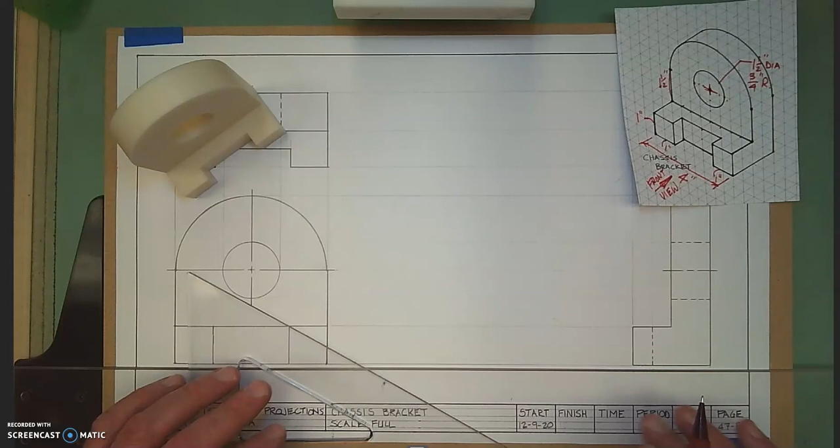The last video I created had shown how to draw the orthographic projection, and I had to stop short. I added the center lines in the front view.

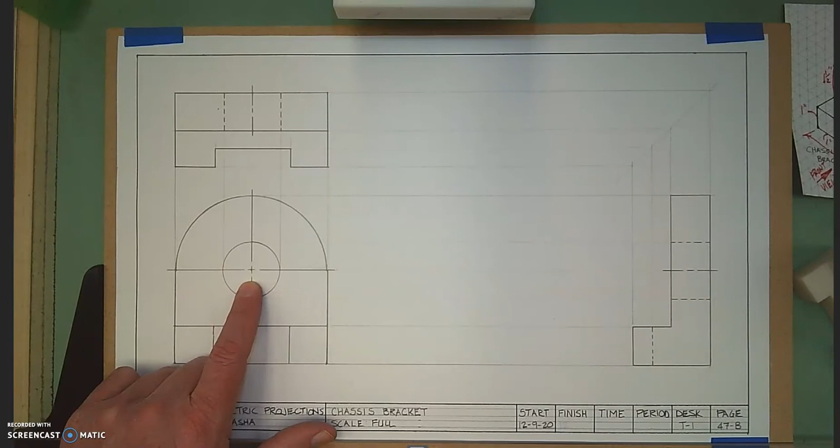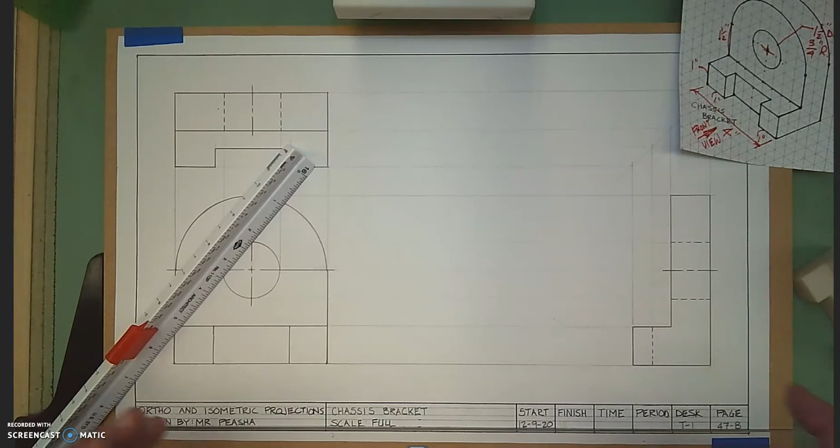Your instructions say that the isometric view is going to start at a point 5 inches away from the right hand borderline, but 7 inches down from the top borderline in our working space. This object is not very thick, it is more narrow. So I'm going to measure over from this borderline 5 inches, and then measure down from the top borderline 7 to get to that point right there.

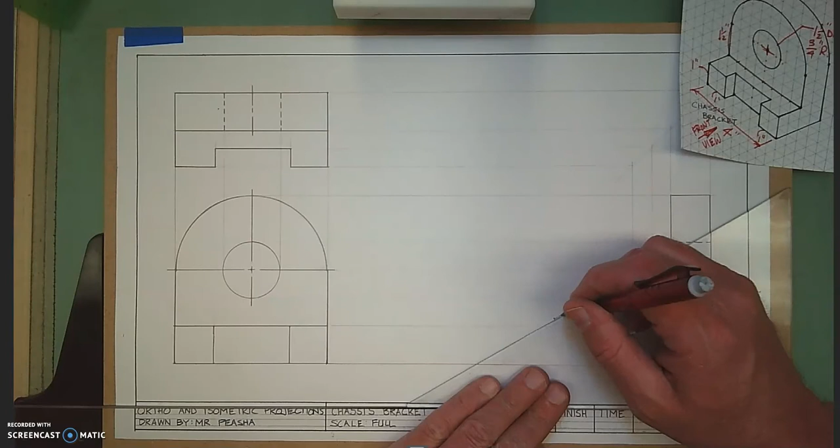Now in this view, all of the lines that are not curved are going to fall on these 30-degree lines for the isometric. So as I start to draw this, I'm going to make some measurements. First I'm going to draw a line up to represent the height of this object. I'm going to measure up 1 inch.

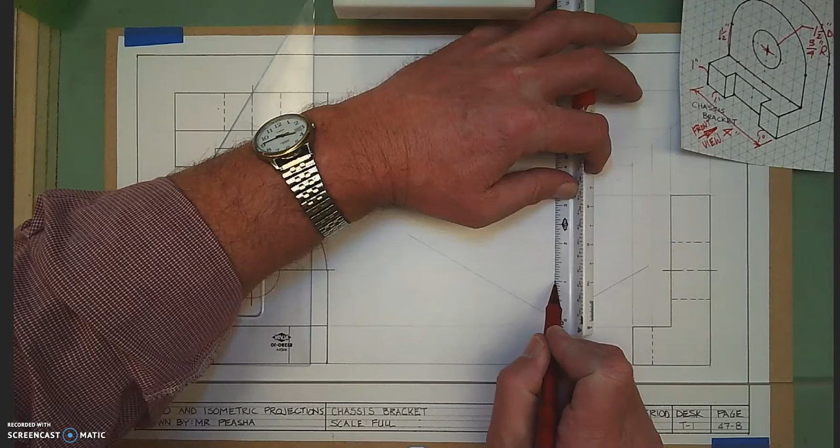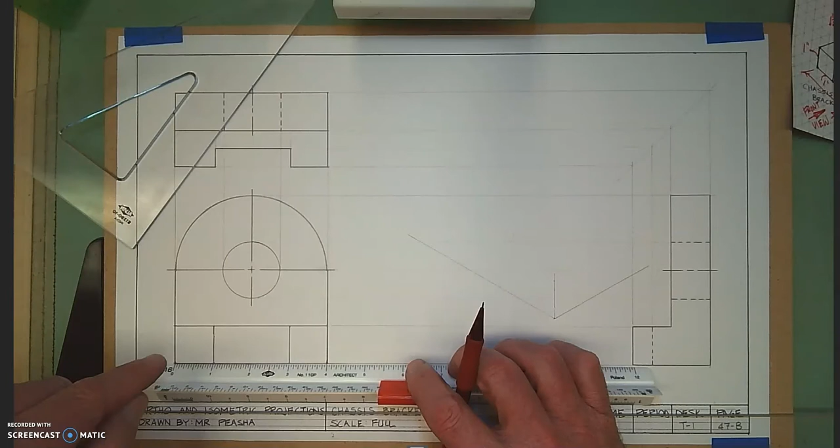And then to find out how wide this is, I'm not going to look at the sketch, I'm actually going to measure my front view. I know that this first line is 1 inch away, there's 2 inches apart, and then there's 1 more inch. So I can measure every line right from the front view to draw my isometric view.

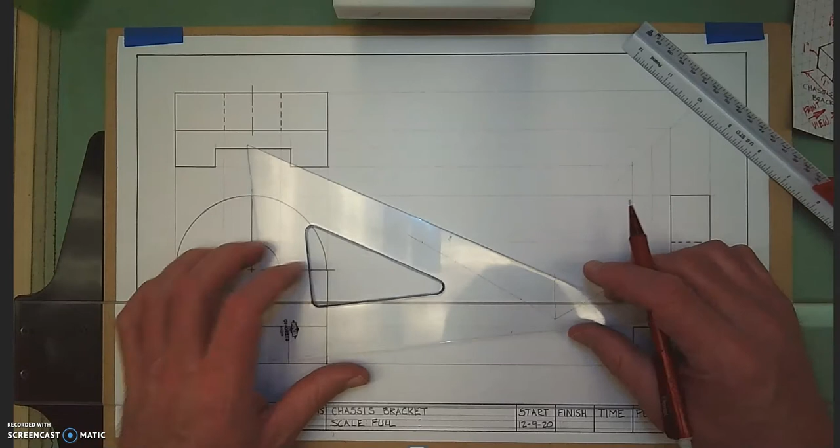So I'm going to make those measurements now on my isometric view. I can measure off 1 inch, then 2 inches, and then again those 4 inches. And now I can draw this front plane with confidence, knowing that I'm going to draw a light line there.

I can go ahead and darken lines as I go. I typically will draw the light lines first, but to save time in the video, I'll draw in these dark lines, representing that front plane.

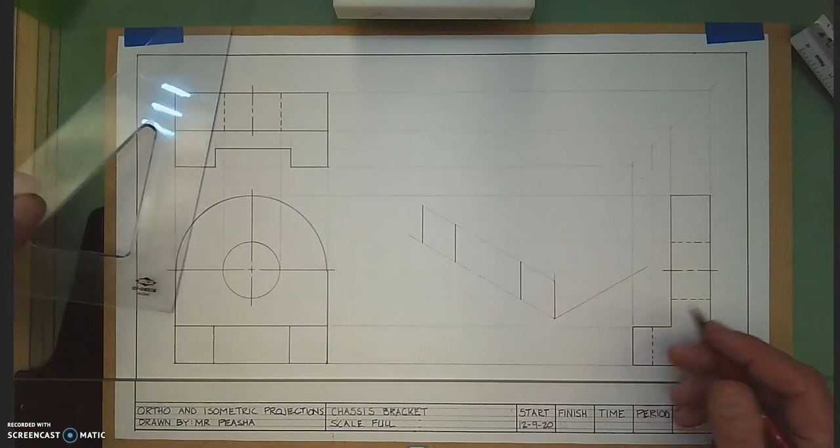I can make the exact same measurements on the right side view. I know this overall thickness is 2 inches, and this back part thickness is 1 inch. I can measure it right from this right side view.

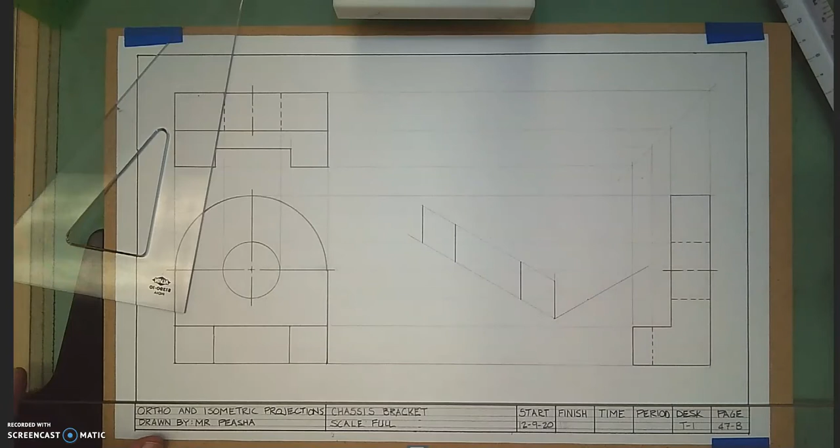So I can make marks on my isometric right on there for what those measurements are. I draw a line up this way and a line up that way. Now I'm going to go ahead and draw in this line here.

I'm going to lightly draw in the surface of this plane, and here's why I'm going to do this, then I'm going to darken these lines.

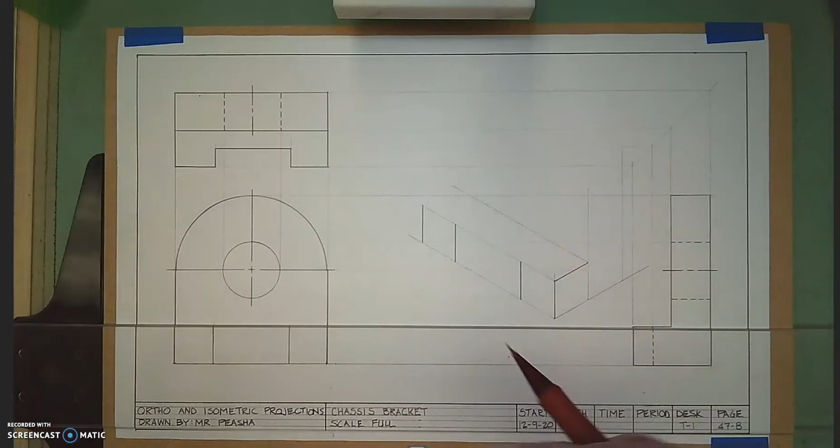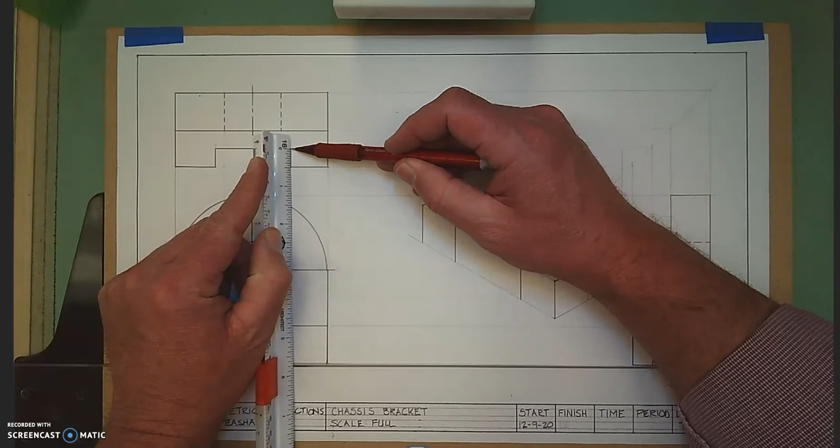For the sake of my demonstration here, I need to make a mark here and here. Then this line is going to go back a distance of this measurement right up here, which is 1/2 of an inch. So I can make that measurement along the light line I drew at 1/2 of an inch.

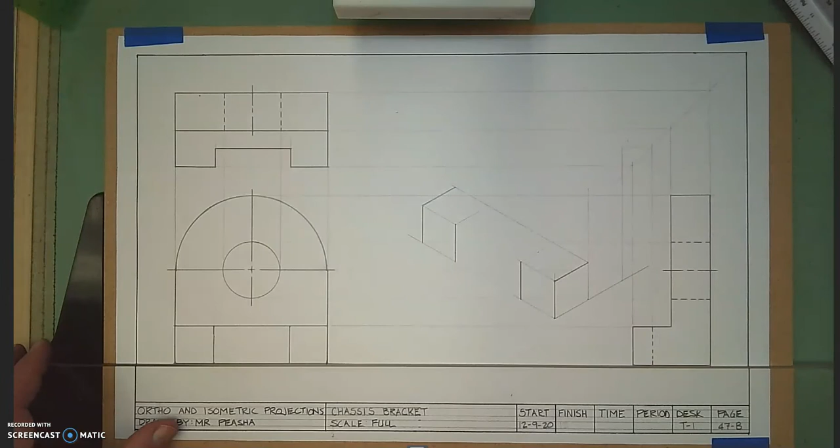I'm going to do a little erasing here just for the sake of this video, so hopefully it doesn't confuse you as far as the lines I'm drawing. I know that's a little bit messy, but I'm going to draw now a dark line here.

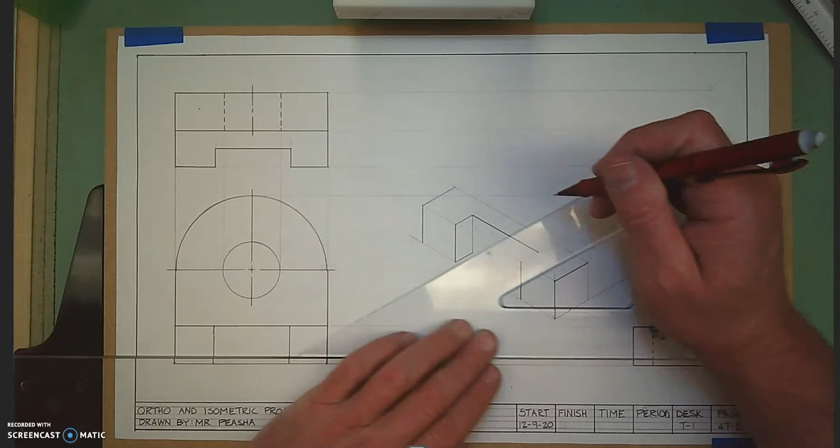I'm going to draw a light line down, and then this line is going to meet that one. I'm going to draw in these other dark lines just so that I represent and show how this drawing is coming together.

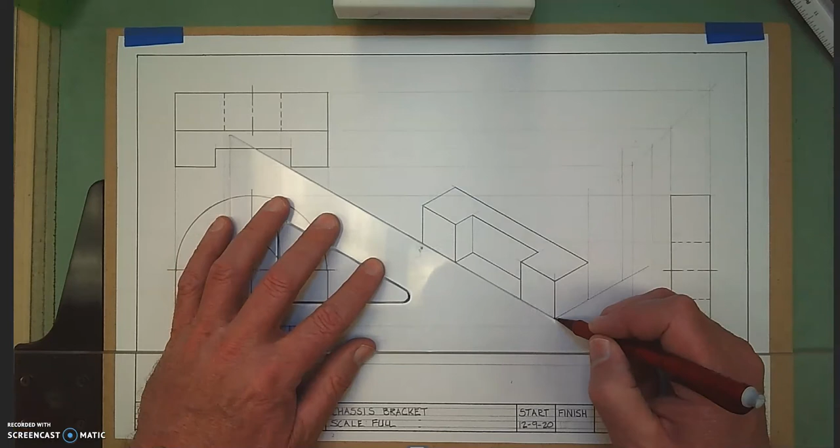I'm darkening this line here. This one lies behind here. These two on top like this, and then this one. So I've drawn in, I'm going to darken this line a little bit more, that front plane.

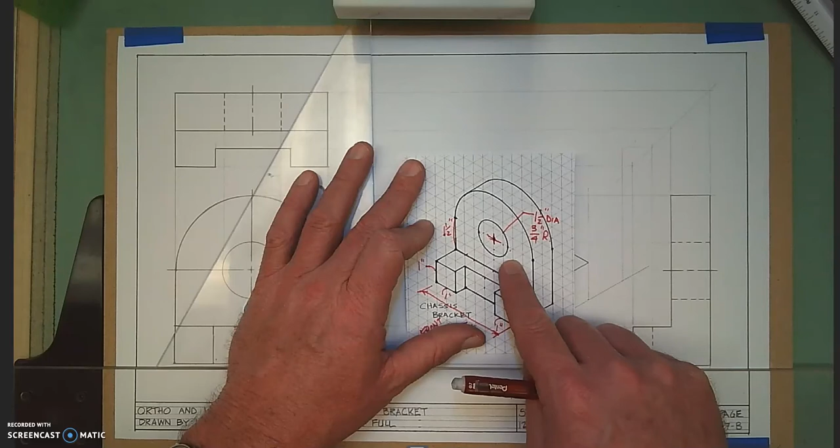Now, the most important part about drawing the ellipses, and the challenging part about this particular drawing, is drawing that large ellipse. But the most important part is finding the center. We don't have to count grids on this sketch anymore, now we have the front view to trust.

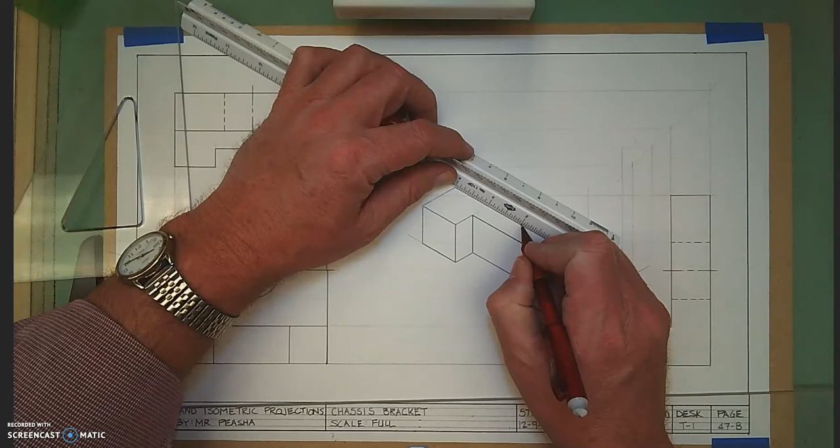Because it was drawn correctly, I can measure over 2 inches and measure up a distance of 1 1/2 inches. So I'm going to measure over on this line to the 2-inch mark, lightly draw a vertical line, and then identify that at 1 1/2 inches.

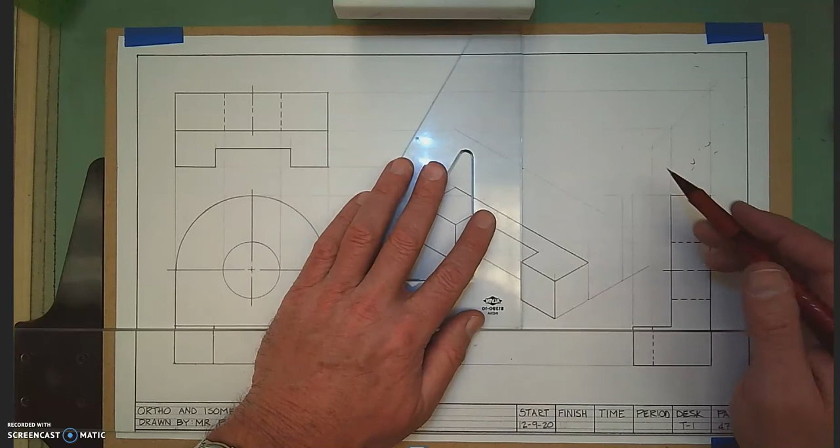I'm going to do a little erasing here. You normally don't need to erase projection lines, but I just want to make this pretty clear on how to draw this. So with that mark I measured, I'm going to draw a line across and darken it a bit so you can see it in the video, that vertical line.

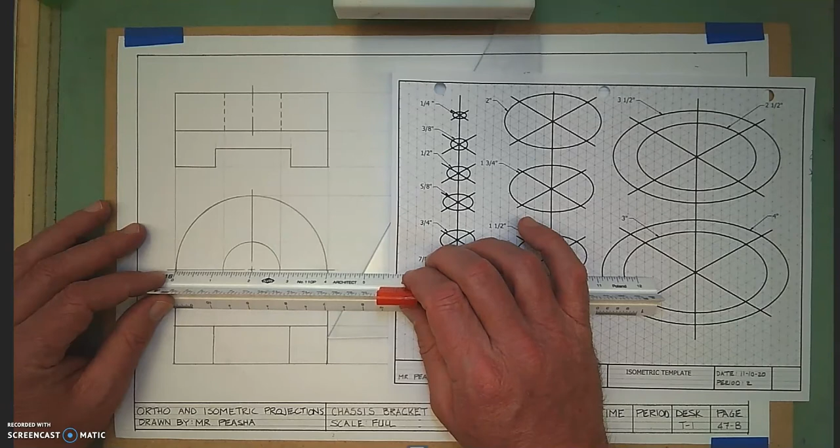Now the challenge is to draw the ellipse. The ellipse template given to you, the very largest ellipse is 4 inches. Remember, we can measure that right here in the front view - that width is 4 inches, measured right from the front view. So the challenge is to rotate this in the proper direction.

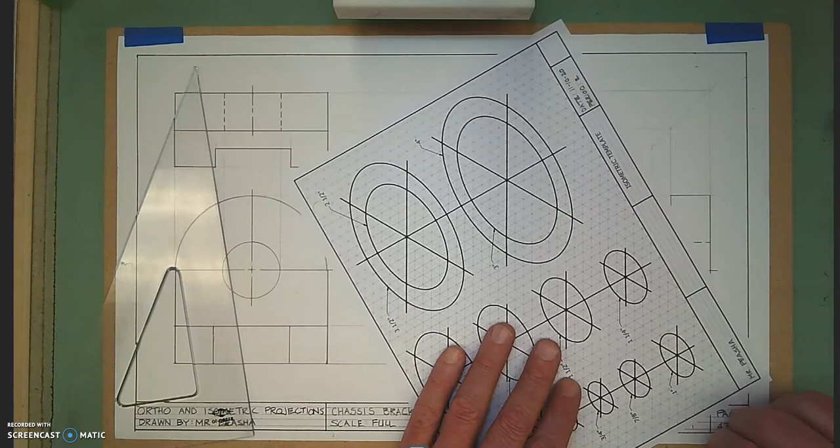We can check this rotation with the sketch, and we can actually rotate it in the same direction. So I would remove this bottom tape, slide a little bit, and slide this template underneath, lining it up with the lines on my drawing below.

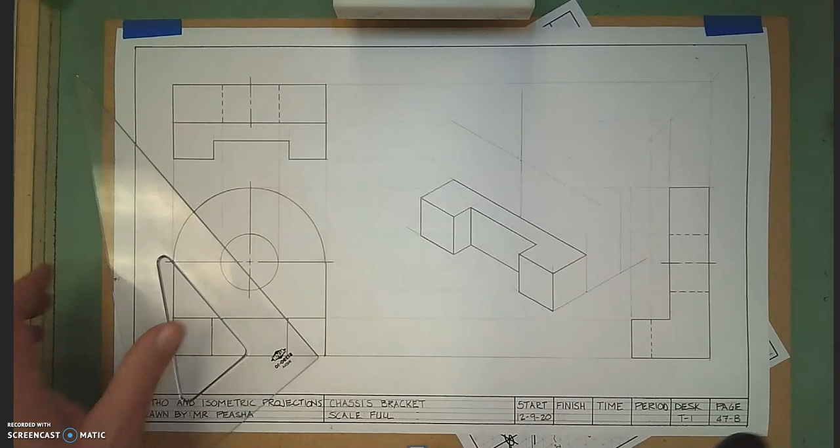Let me go back just a minute - I should have done this a bit sooner, but these lines that come off this edge are going to meet that 30-degree angle line, which represents horizontal. It gives me a better idea of where my template is going to line up.

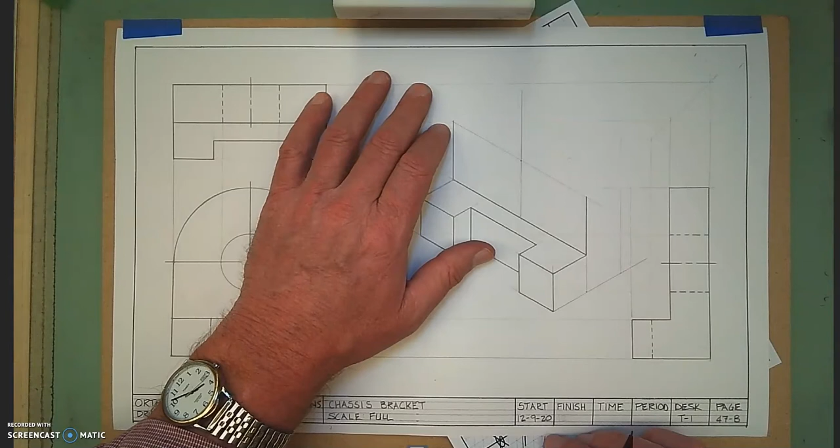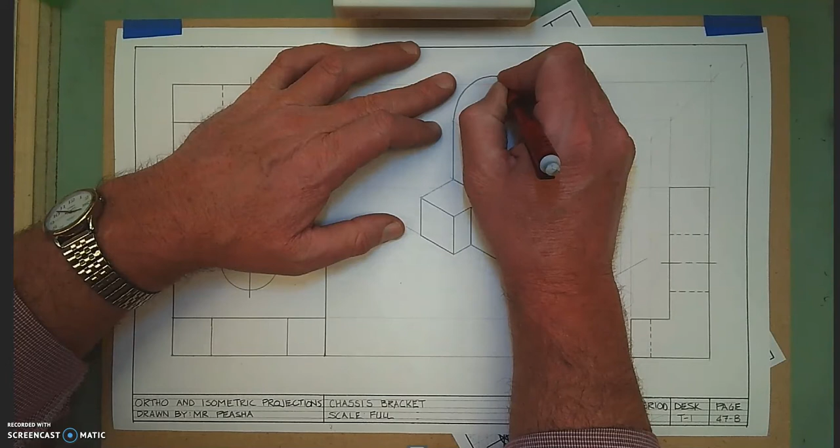Once you get that template lined up the very best you can - it's a bit difficult to do - then you'll trace this line. This is where that freehand sketching technique comes into play. We practiced and practiced, getting as close as you possibly can.

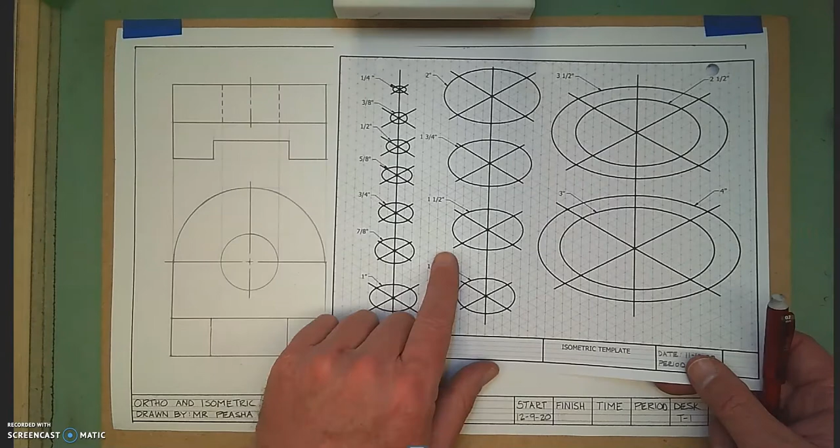Now, so far so good. We've drawn that in. You can go ahead and draw in the other ellipse - remember, the diameter was 1.5 inches. Again, we'll rotate that into view and slide it under our paper to find the 1.5 inch ellipse. This takes a bit of work.

I know you can figure this out. I know you can do it. I have faith in you. It's hitting my camera stand here, bending the paper.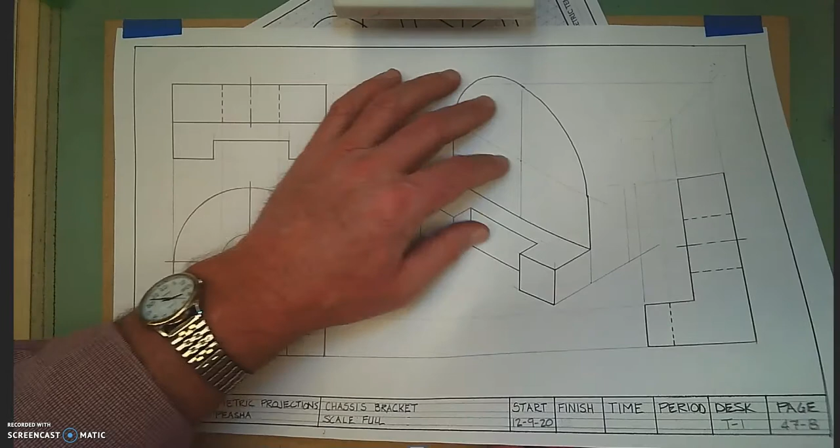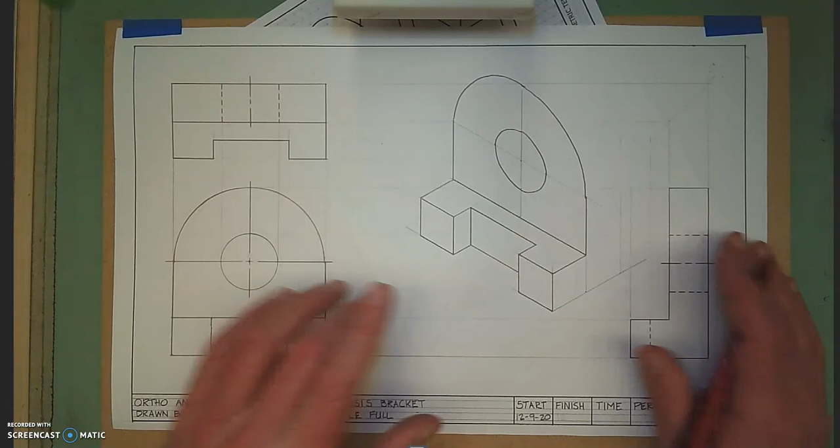There we go. And then I can draw this line here. A little bit of work there, just like that. It's not the best, but we're really close. Now, to draw this second line - that second line has the exact same center.

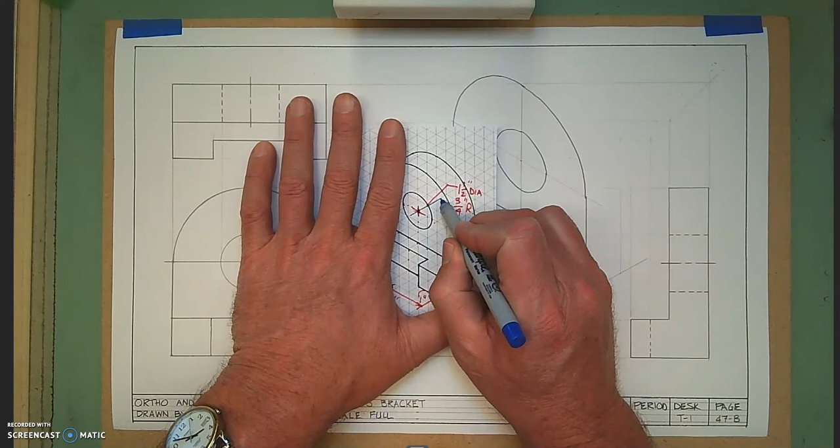The only thing is that center now has moved back into the plane - let me draw it in blue here. It's moved back into the plane. How far? It's this far, from here to here - that is 1 inch. So it's moved back to this 1 inch part in that plane.

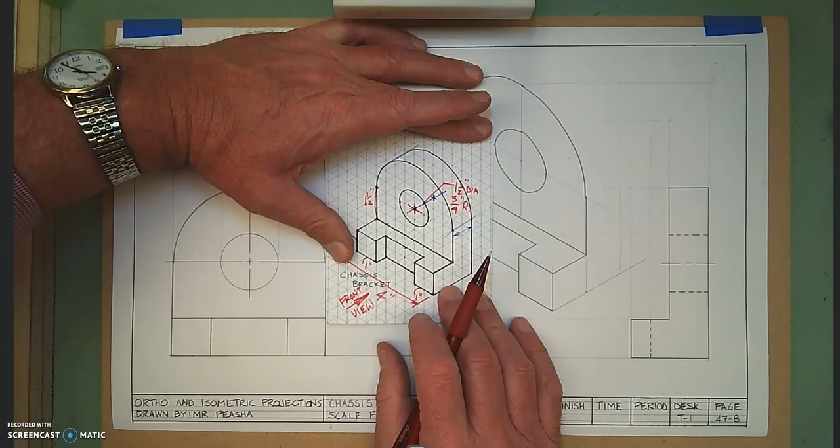We can do a couple things here. We can lightly draw in this tangent line, lightly draw in this tangent line up here, and then lightly draw back and find the center. Then we can use our template again. This takes a little bit of work.

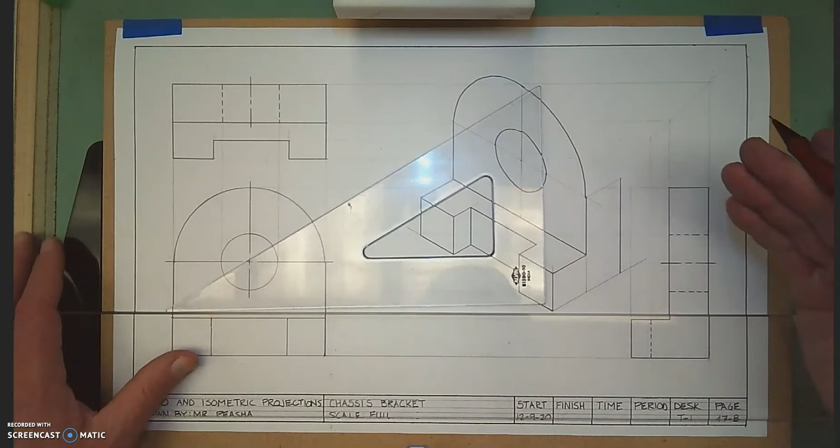So this line draws back to where it meets this vertical line in the back here, which identifies this plane. This line is not on our view - I just lightly drew it in to get started. This line ends up not being on our plane, on our drawing either.

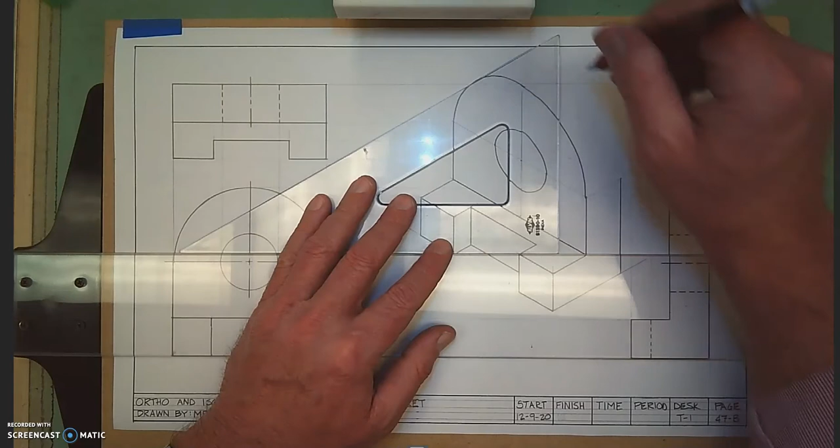I'm going to lightly draw in, like I said earlier - hope this drawing fits. Right there, it does, I know it will. And then we're going to lightly draw this one back, measure 1 inch.

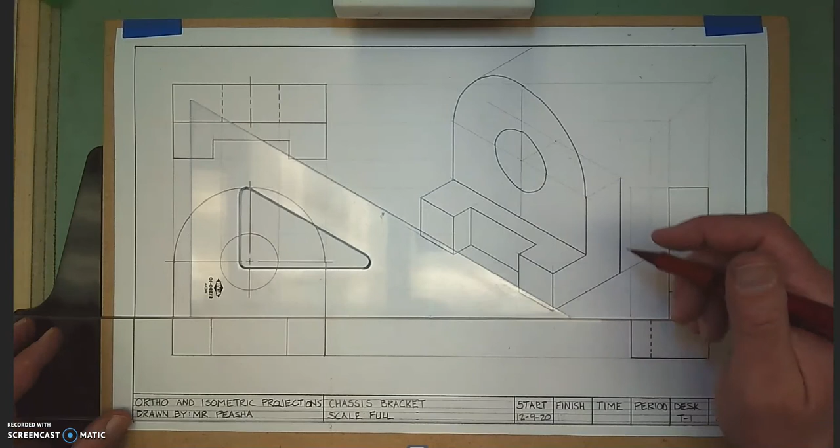And then that's going to give us a line that we can use as a reference point for our ellipse to trace.

So I've drawn in a new center point that's back into the plane, this thickness. Then I can slide this paper underneath here - again, I'm sighting through the paper, looking underneath to find out where it all lines up. Oh boy, it just does.

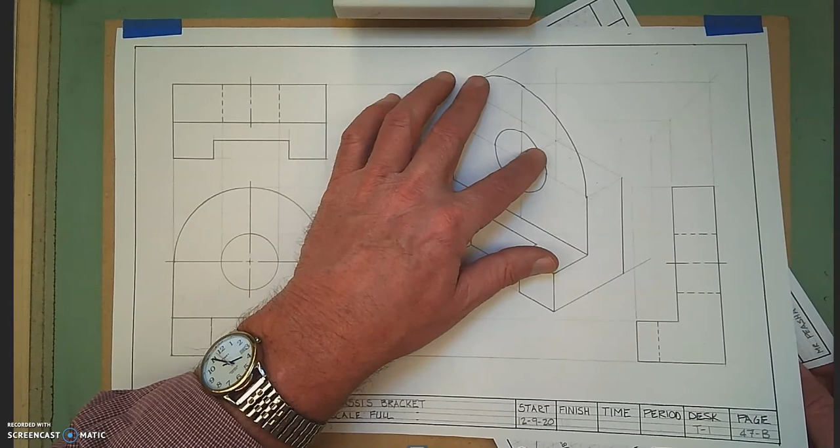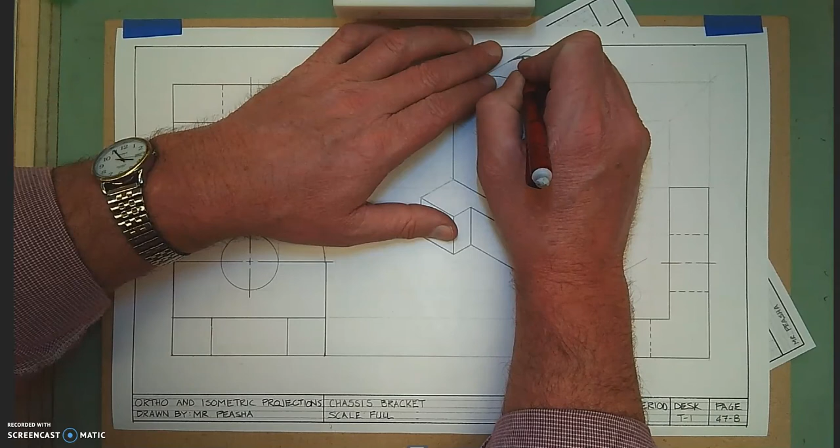Look at that - I know you can't see that very well, but this line I can trace right down here, up here to that top, and then this line right here is going to meet as a tangent. I'm going to freehand that little part in, give that a little bit of an erase.

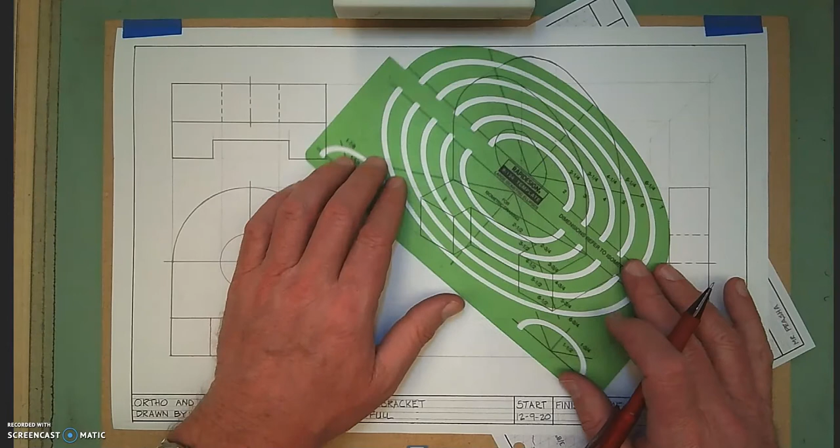Now, typically, to draw these larger ellipses in class, we use this really cool ellipse template, and you have to line up the centers just like you're doing on your paper underneath. You line up those ellipses to draw that 4-inch ellipse on there.

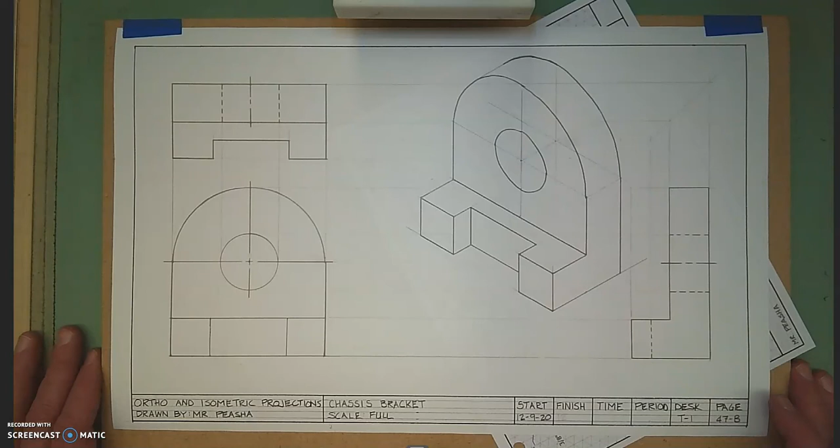Cool, alright. There is what the finished drawing should look like. Let me take this piece of paper out - so with the orthographic projection as well as the isometric view.